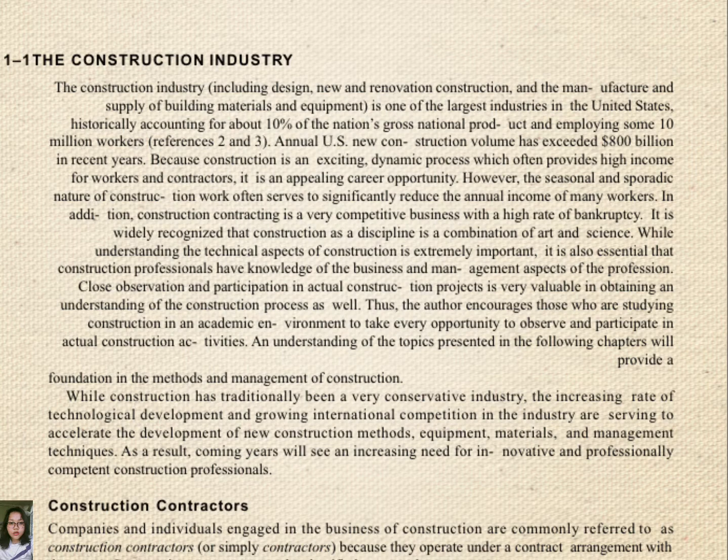Construction contractors: companies and individuals engaged in the business of construction are commonly referred to as construction contractors, or simply contractors, because they operate under a contract arrangement with the owner. Construction contractors may be classified as general contractors or specialty contractors.

General contractors engage in a wide range of construction activities and execute most major construction projects. When they enter into a contract with an owner to provide complete construction services, they are called prime contractors. Specialty contractors limit their activities to one or more construction specialties, such as electrical work, plumbing, heating, and ventilating, or earth moving. Specialty contractors are often employed by a prime contractor to accomplish some specific phase of a construction project.

Since the specialty contractors are operating under subcontracts between themselves and the prime contractor, the specialty contractors are referred to as subcontractors. Thus, the terms subcontractor and prime contractor are defined by the contract arrangement involved, not by the work classification of the contractors themselves.

Thus, a specialty contractor employed by an owner to carry out a particular project might employ a general contractor to execute some phase of the project. In this situation, the specialty contractor becomes the prime contractor for the project, and the general contractor becomes a subcontractor.

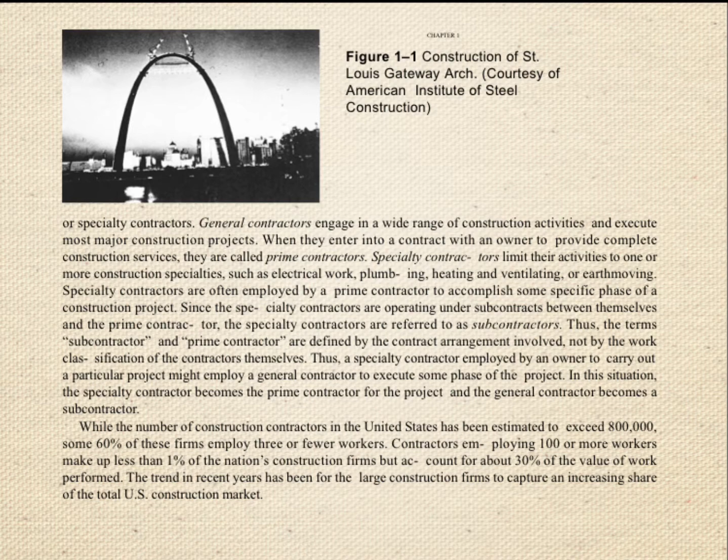Moving on, construction industry divisions. The major divisions of the construction industry consist of building construction, also called vertical construction, and heavy construction, also called horizontal construction. The distribution of total United States construction volume for a representative year is illustrated in Figure 1-2. Building construction, Figure 1-3, as the name implies, involves the construction of buildings.

This category may be subdivided into public and private, residential and non-residential building construction. While building construction accounts for a majority of the total U.S. new construction market, see Figure 1-2, many of the largest and most spectacular projects fall in the heavy construction area.

Heavy construction, Figure 1-4, includes highways, airports, railroads, bridges, canals, harbors, dams, and other major public works. Other specialty divisions of the construction industry sometimes used include industrial construction, process plant construction, marine construction, and utility construction.

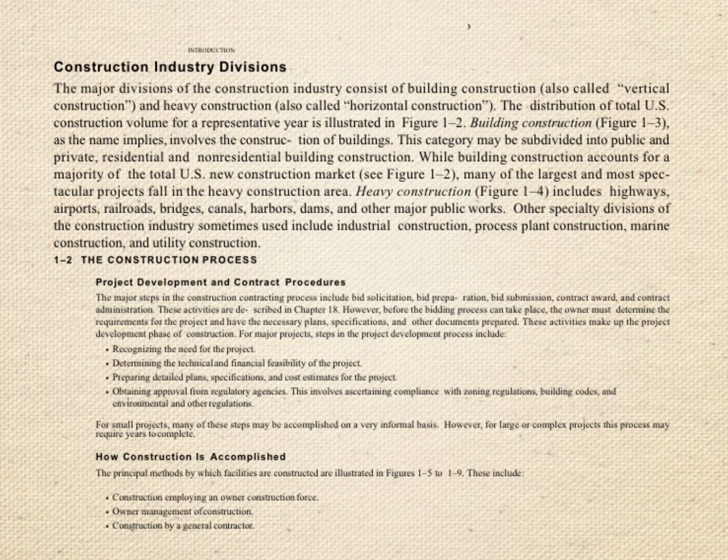So here are the important things to remember for the construction process: the project development and contract procedures. The major steps in the construction contracting process include bid solicitation, bid preparation, bid submission, contract award, and contracts administration.

This part or activity will soon be discussed by my fellow reporter assigned to Chapter 18. However, before the bidding process can take place, the owner must determine the requirements for the project and have the necessary plans, specifications, and other documents prepared. These activities make up the project development phase of construction.

For major projects, the steps in the project development process include recognizing the need for the project. It is very important to recognize the need for the project because it could be identified as a result of a problem or an opportunity for you or your team to improve. The overall goal of the project will always be to improve or take advantage of a particular situation.

After the initial need identification, you will have to gather data. Next is determining the technical and financial feasibility of the project.

It's important to determine the technical feasibility because it helps organizations determine whether the technical resources meet capacity and whether the technical team is capable of converting the ideas into working systems.

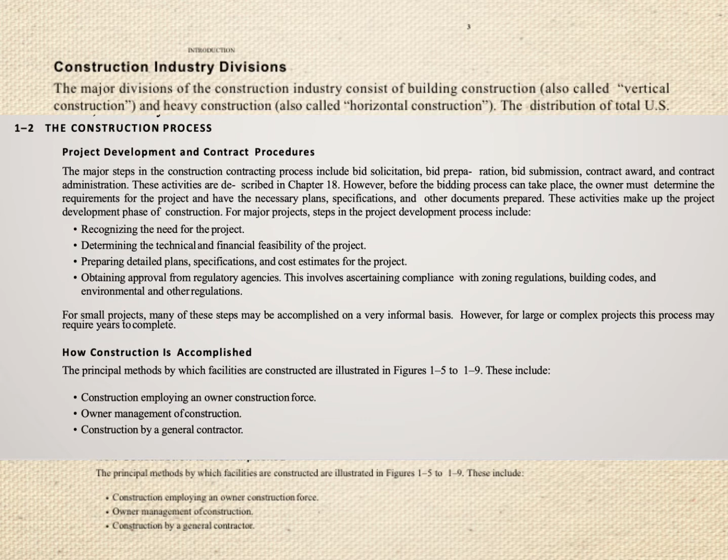How construction is accomplished: the principal methods by which facilities are constructed are illustrated in Figure 1-5 to 1-9. These include construction employing an owner construction force, and owner management of construction, and construction by a general contractor.

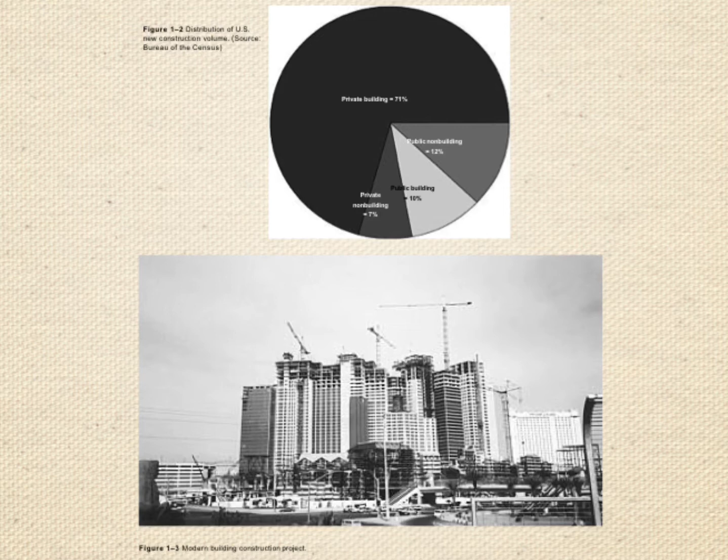Moving on, this pie chart shows the distribution of United States new construction volume. This is Figure 1-2 that I discussed earlier.

The heavy construction project, Kennedy Space Center Launch Complex, United States Air Force, and many large industrial organizations as well as a number of governmental agencies possess their own construction forces, although these forces are utilized primarily for performing repair, maintenance, and alteration work. They are often capable of undertaking new construction projects.

More frequently, owners utilize their construction staffs to manage their new construction. The work may be carried out by workers hired directly by the owner, by specialty contractors, or by a combination of these two methods.

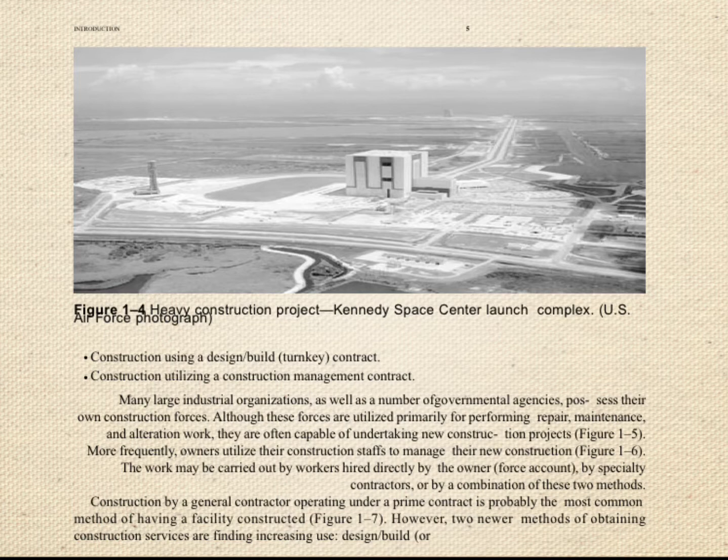Construction by a general contractor operating under a prime contract is probably the most common method of having a facility constructed. However, two newer methods of obtaining construction services are finding increasing use: design-build or turnkey construction, and construction utilizing a construction management contract.

Under the design-build or turnkey construction concept, an owner contracts with a firm to both design and build a facility meeting certain specified, usually performance-oriented requirements. Such contracts are frequently utilized by construction firms that specialize in a particular type of construction and possess standard designs which they modify to suit the owner's needs.

The same organization is both designing and building the facility. Coordination problems are minimized and construction can begin before completion of final design.

Under conventional construction procedure, it is also possible to begin construction before design has been completed. In this case, the construction contract is normally on a cost reimbursement basis. This type of construction is referred to as fast track.

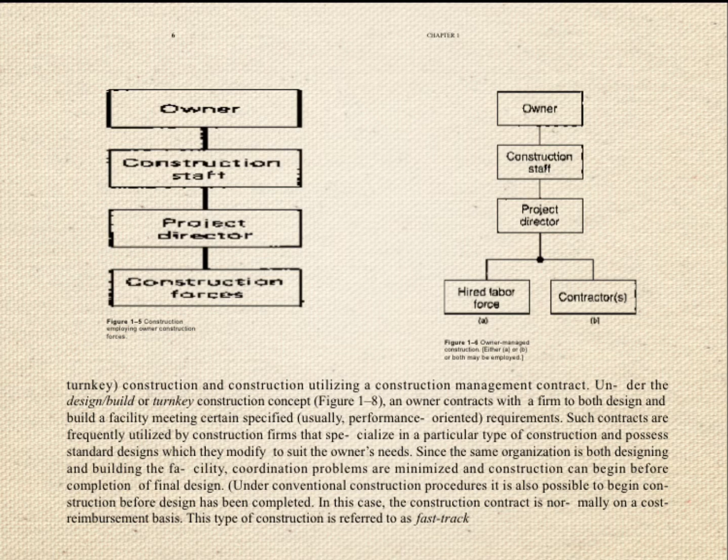Another diagram: the major disadvantages of the design-build concept are the difficulty of obtaining competition between suppliers and the complexity of evaluating their proposals.

Construction of a facility utilizing a construction management contract is also somewhat different from the conventional construction procedure. Under the usual arrangement, also known as agency construction management, a professional construction manager acts as the owner's agent to direct both the design and construction of a facility. Three separate contracts are awarded by the owner for design, construction, and construction management of the project.

This arrangement offers potential savings in both time and cost compared to conventional procedures as a result of the close coordination between design and construction. However, opponents of the method point out that the construction manager typically assumes little or no financial responsibility for the project, and that the cost of his/her services may outweigh any savings resulting from improved coordination.

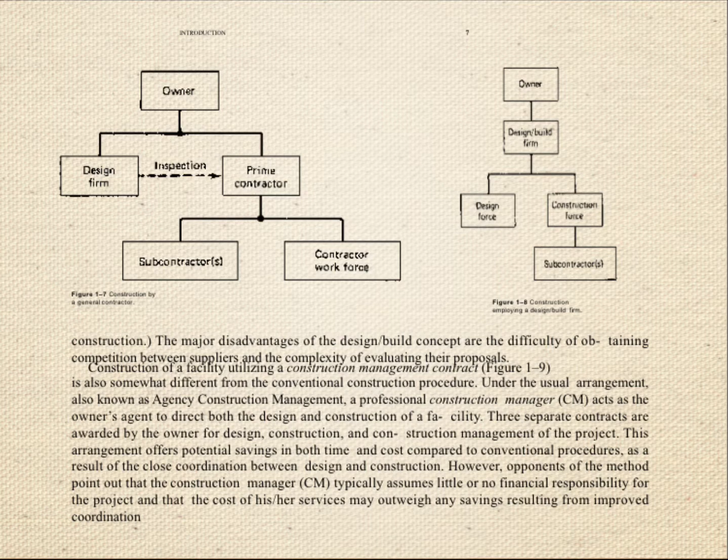Here is another diagram: construction utilizing a construction management contract. Between design and construction, there is another less common form known as guaranteed maximum price construction management. Under this arrangement, the construction manager guarantees that project costs will not exceed a specified amount. This procedure entails a certain amount of contractor risk, and the construction contract is also normally held by the construction manager.

These are the codes and regulations that projects constructed in most areas of the United States must comply with: a number of governmental regulations, including building codes, zoning regulations, environmental regulations, and contractor licensing laws, among others.

Building codes. Building codes, which are concerned primarily with public safety, provide minimum design and construction standards for structural and fire safety. As the name implies, such codes apply only to the construction of buildings.

In the United States, the Board of Fire Underwriters in 1905 published a recommended National Building Code, which provided minimum standards for fire protection and structural safety. This code, later known as the Basic National Building Code, published by the Building Officials and Code Administrators International, was the only nationally recognized building code for a number of years.

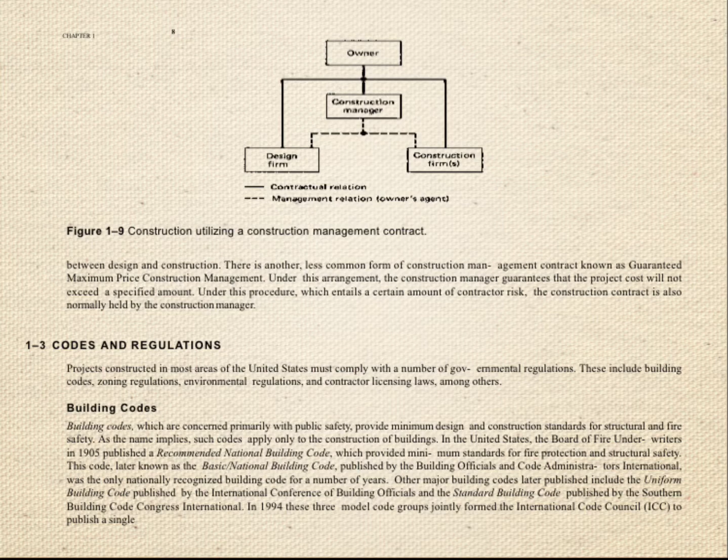Other major building codes later published include the Uniform Building Code, published by the International Conference of Building Officials, and the Standard Building Code, published by the Southern Building Code Congress International. In 1994, these three model code groups jointly formed the International Code Council to publish a single set of model construction codes. Some international codes since published include the International Building Code and the International Residential Code, which governs the construction of one and two family dwellings.

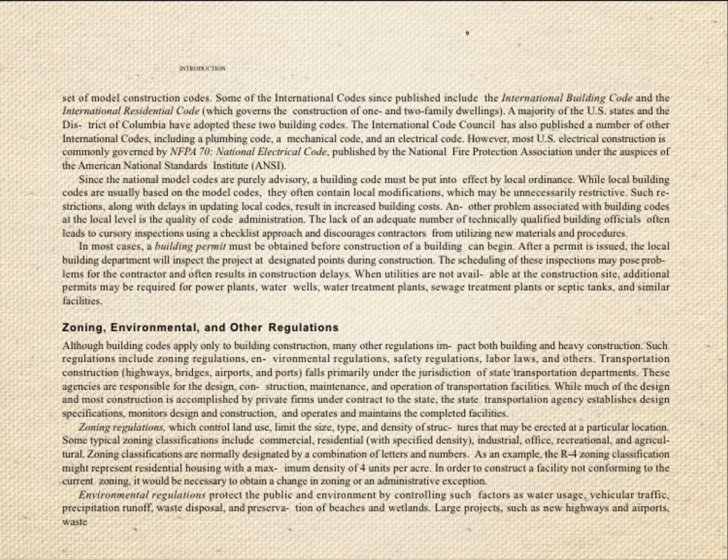Zoning, environmental, and other regulations. Although building codes apply only to building construction, many other regulations impact both building and heavy construction. Such regulations include zoning regulations, environmental regulations, safety regulations, labor laws, and others.

Transportation construction, including highways, bridges, airports, and ports, falls primarily under the jurisdiction of state transportation departments. These agencies are responsible for the design, construction, maintenance, and operation of transportation facilities. While much of the design and most construction is accomplished by private firms under contract, the state transportation agency establishes design specifications, monitors design and construction, and operates and maintains the completed facilities.

Zoning regulations control land use, limiting the size, type, and density of structures that may be erected at a particular location. Some typical zoning classifications include commercial, residential with specified density, industrial, office, recreational, and agricultural. Zoning classifications are normally designated by a combination of letters and numbers. As an example, the R4 zoning classification might represent residential housing with a maximum density of 4 units per acre.

In order to construct a facility not conforming to the current zoning, it will be necessary to obtain a change in zoning or an administrative exception.

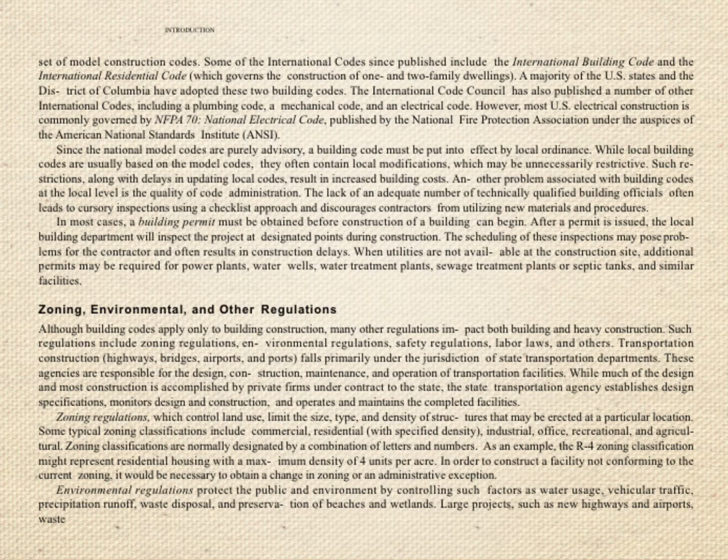Environmental regulations protect the public and environment by controlling such factors as water usage, vehicular traffic, precipitation runoff, waste disposal, and preservation of beaches and wetlands. Projects such as new highways and airport facilities, major shopping centers, large industrial plants, large housing developments, and athletic centers may require preparation and approval of an environmental impact statement quantifying the effect the project will have on the environment.

The preparation of an EIS is a complex, time-consuming task undertaken only with the assistance of a professional experienced in such matters. If municipal utility services are not available at the project site, additional permits may be required for water treatment plants, wells, sewage treatment, and similar facilities.

Safety regulations are designed to protect both construction workers and the public. In the United States, almost all industries, including construction, are governed by the Occupational Safety and Health Act of 1970, administered by the Occupational Safety and Health Administration. The construction profession is also regulated by a number of governmental licensing and certification procedures.

Industry or construction productivity: U.S. construction productivity, measured as output per labor hour, had shown an average annual increase of about 2% during the period after World War II until the mid-1960s, but actually declined between 1965 and 1980. During the same period, inflation in construction costs rose even faster than inflation in the rest of the economy. However, indications are that construction productivity again increased substantially in the 1980s and 1990s.

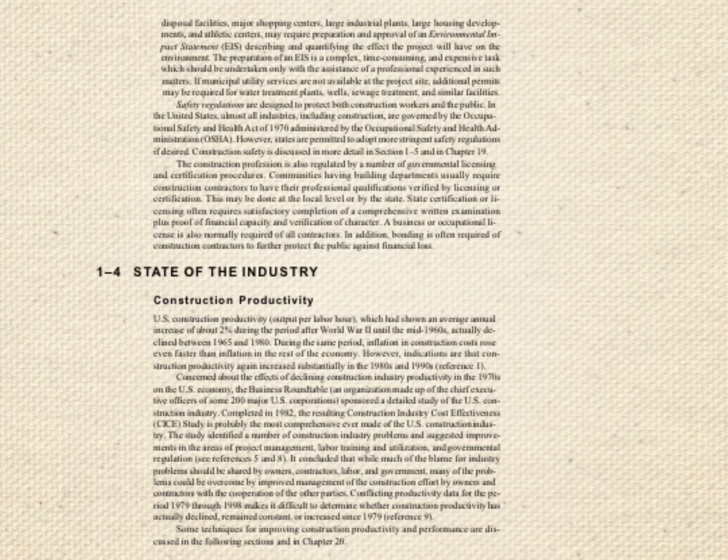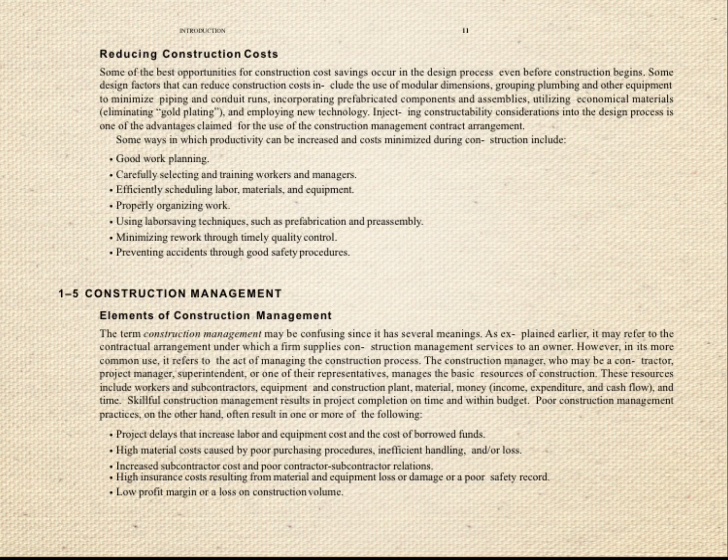Poor construction management practices, on the other hand, often result in one or more of the following: project delays that increase labor and equipment costs and cost of borrowed funds, high material costs caused by poor purchasing procedures, inefficient handling, and/or a loss, increased subcontractor costs and poor contractor-subcontractor relations, high insurance costs resulting from materials and equipment loss or damage, or a poor safety record, and low profit margin or a loss.